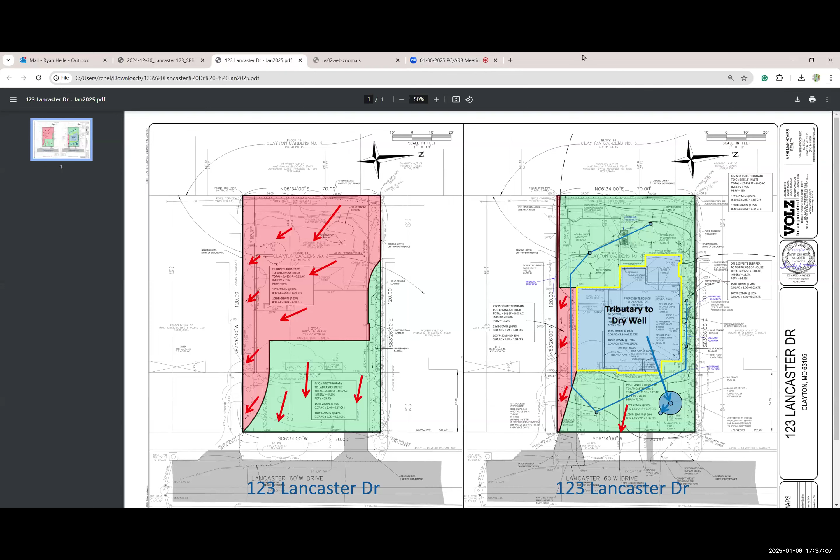Hey, everybody hear me? Welcome, Eric. Great, I wasn't sure I was logged in properly here. As Anna stated, we made some minor changes to the site. We are increasing the runoff a little bit, by about 0.07 CFS. But to counter that or mitigate that, we designed the site to have the entirety of the roof area go to the dry well in the front yard.

And that is a volume of 0.21 CFS. So the dry well is sized to accommodate that entire runoff for the 15-year, 20-minute rain event. So we're detaining more than exactly 3 times as much as our differential.

We have one neighbor to the south that had runoff going to them, and we dropped that from 0.27 to 0.03 CFS. No other neighbors were getting any direct runoff. Everything else is going out to the street. If the geotech report indicates that the dry well needs to be upsized, there's still plenty of room in the front yard that we could expand that dry well as needed. If there are any questions, I'm more than happy to answer them.

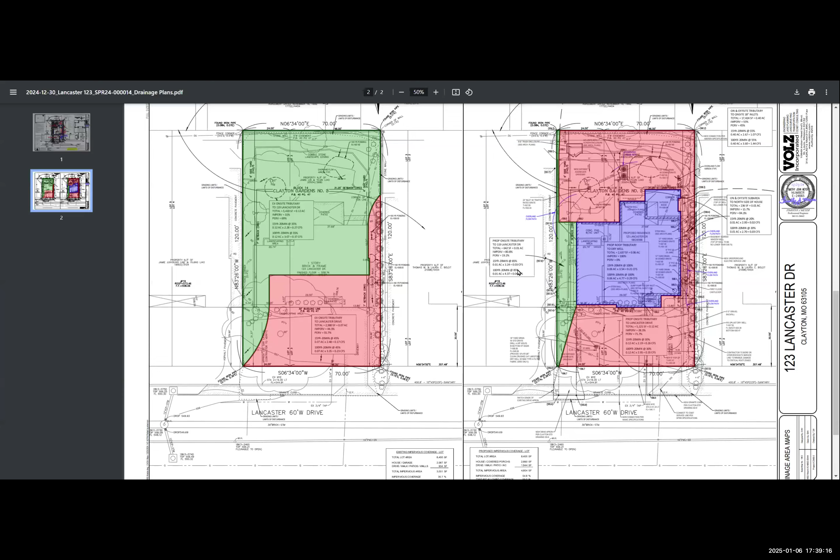I think, sure, yes, just a quick summary. Well, it's actually very easy. All those yard drains go to another yard drain that's out in the front that will act as a pop-up emitter. The size of the pipe is larger than the available pop-up emitters. NDS makes pop-ups in sizes of 3-inch, 4-inch, and 6-inch. We have an 8-inch pipe going out to the front, coming around from the back, the backyard, and the driveway. So we can't use a pop-up.

What I did was use a yard drain as an emitter, and I've used this on a few MSD approved projects coming out of MSD bioretention basins, and they've approved those in the past. Not that they probably weren't looking that closely at this, but MSD has already approved these plans. Like I said, it's a solution I've used a few times when we have pipes that are larger than we could normally put a pop-up on. So all 5 of those yard drains go to that one in the front, and that's the final discharge point.

And we had to do this solution because there's not a whole lot of slope on this site to be able to allow for daylighting a pipe once you get drain basins deep enough for them to actually function and convey just as they're manufactured.

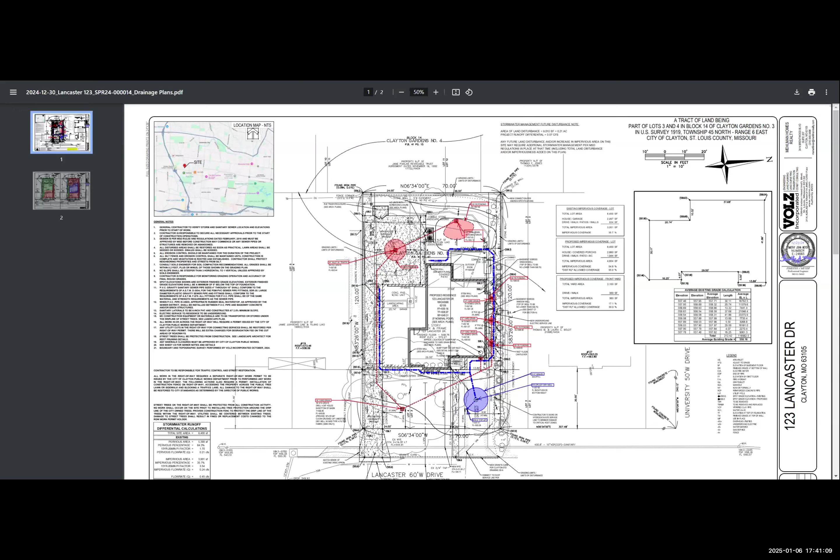Oh, okay, so they're all going out to that blue dry well. No, there's an 18-inch yard drain just north of the driveway. It's highlighted, there's a rectangle around the 18-inch yard drain note on the screen. It's on the other side of the yard from the dry well. I try to keep yard drains out of dry wells whenever possible, just because surface debris clogs up a dry well much quicker.

Okay, now that makes sense, thank you for that. My pleasure. Good, well, reading it on an 11 by 17 was a little difficult, but the screen has made it better, as well as your explanation. Well, thank you, I'm glad.

Let's see, are there other questions, Bob?

I'm just concerned about the water runoff. You're going to do a percolation test by a qualified geotechnical engineer. Your intention is to do that as soon as you get approval of this. Is that where we're heading? Well, that's staff's recommendation. So if staff is recommending we need to do a soil infiltration or percolation test, then that needs to be done.

The staff report did not specifically state when that needed to be done. Usually that would probably be closer to the time we would be digging for the dry well. That way construction traffic doesn't alter the soil characteristics. You could get a very favorable reading right now, but once all the construction traffic moves through there, you could get a different reading. So I would suggest that the city allow us to wait until prior to construction of the dry well to do that percolation test rather than doing it at the onset of construction. But that is up to staff.

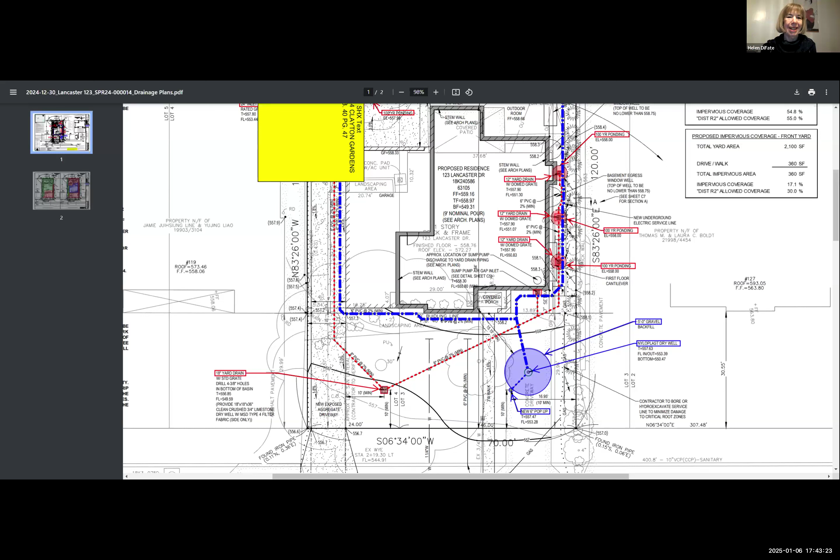All right, Kami? Just one quick question. So when I look at the proposed drainage area map, is all the stuff in the purple that's encapsulating the house going to the dry well? And then all the pink is going to that pop-up in the front of the house, is that right? Yeah, all of the pink is going out to the street.

So then what is the other drainage in the backyard? Everything in the backyard is being piped out to the street. There's a little sliver of green on the south side of the proposed house that goes to the neighbor.

And that's where that significant reduction from 0.27 to 0.03 is found. Everything else goes out to the street, and there's a street inlet just south of, basically in front of the neighbor's house to the south. So it has to pass one driveway before it gets into the MSD sewer system.

Okay, and so then all the pop-up in the front yard, when it gets filled, that goes where? Just goes out to the street and then into the sewer. Okay, and so then what is right to the south of that driveway on this property? It's the neighbor's driveway.

So is there any concern that when that pop-up pops up and the water comes out of it, it'll flow over this person's driveway into their neighboring driveway? No. Anything that comes out of this 18-inch yard drain, if it goes south before going to the street, it's going to get to the proposed driveway, which will then convey it directly to the street just by its slope characteristics.

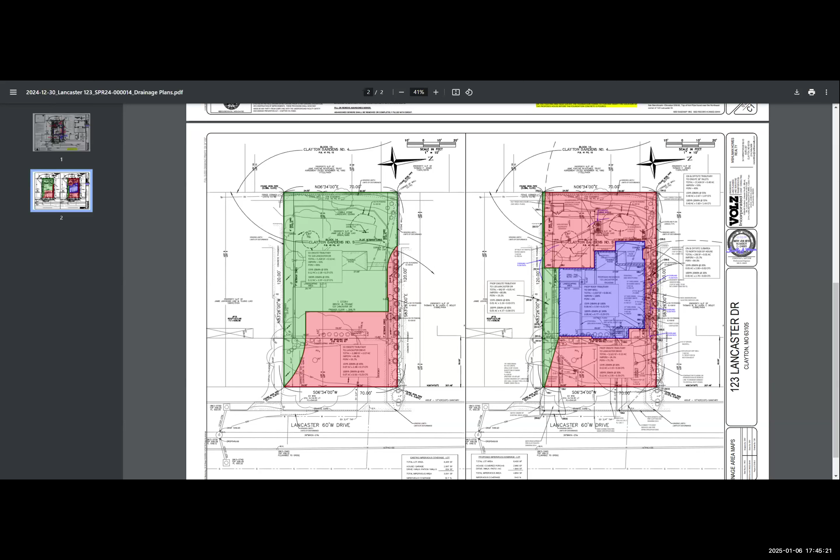Overall, I think I'm pretty good. I really like the idea of the percolation test. For several weeks now we've discussed dry wells and the sizing of dry wells, and we've mentioned the fact that we're not civil engineers, so it's tough for us to determine the size of a dry well. So I really like the solution of taking our best stab at it, but then doing a test to make sure we get it right. But other than that, no further questions.

Okay, David? No questions. Okay, we do have two conditions on the staff recommendation.

Eric or Lauren, are you in agreement with that? I've read both, the deed restriction is a standard one, that's always a condition for approval of my site plan. So the only other one would be the soils report or percolation test. If that's what staff is recommending, then that's what we need to do. Just need to work out the timing of that, and that could be worked out with staff if this board is okay with that.

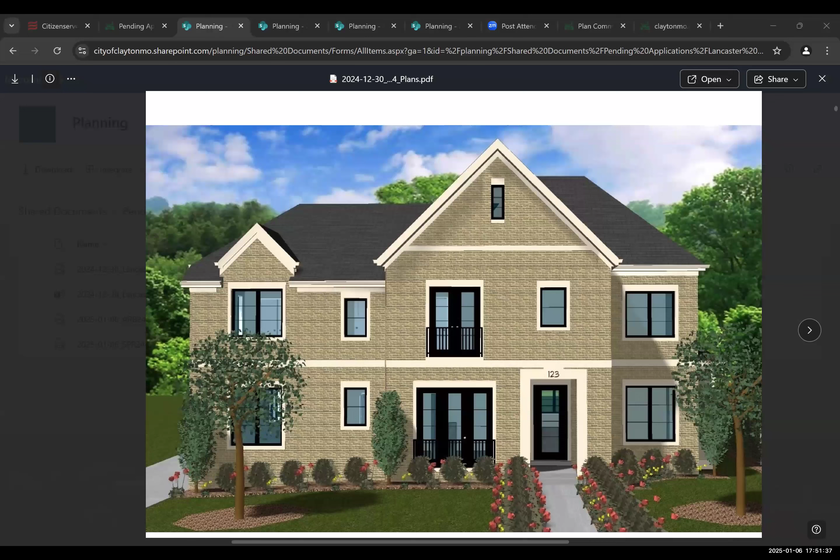I think it blends in well with the neighbors, and I think Ryan Helle wrote a very nice report explaining how we did the height mitigation to the existing home to the left. We're lower than the Boldt residence to the right, and then we mitigated the height to the existing older home to the left.

Well, Lauren, you mentioned the air conditioning compressors. They look like they're not adjacent to the house. Is that correct? That's correct. They're off the driveway to the rear of the house. We didn't want them too close to the porch. They're kind of right in the middle of the property, actually.

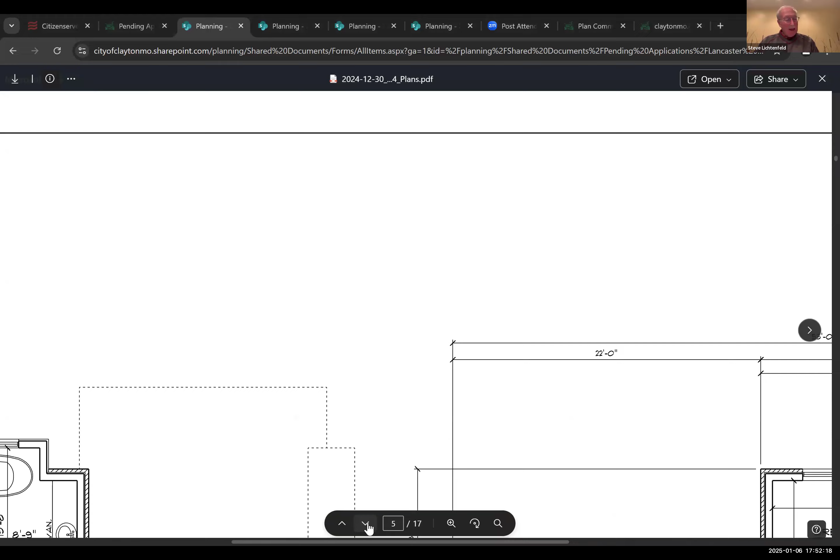Yeah, okay, I don't think we've seen that before. Yeah, we carefully considered that location with Mark and Debbie Melman, and that's where they would like to put them. You'll see the Baxter Gardens plan has quite a bit of landscaping all around those AC units as well. We couldn't really put them on the side of the neighbor to the right because of the wall and the existing landscaping, and we couldn't put them on the left because we have a driveway there, so they ended up in the rear.

Yeah, well I just had a question about that.

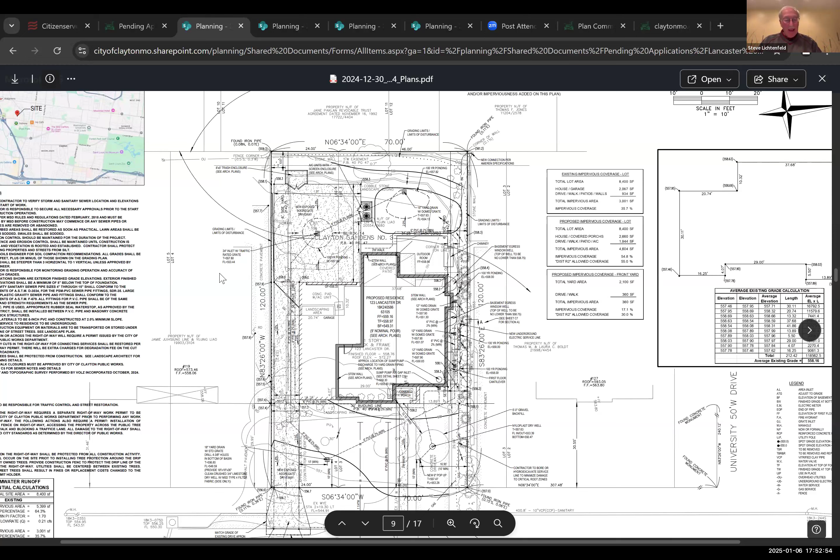I think it looks pretty good, being in the Clayton Gardens Development District. There's the plan. You have a partial step down on the south side, that would be the left side. Quite often we've seen a longer step down, not just at the rear of the property, but I think it works pretty well. And I'm okay with it.

The materials and the dimensions and the roof, they all look good. I'm also glad to see that the floor level is pretty well at grade or just slightly above it. The Bolt residence next door, the first floor level is much higher than the grade, but I think it works out well on the Melman residence. So I'm okay. Bridget?

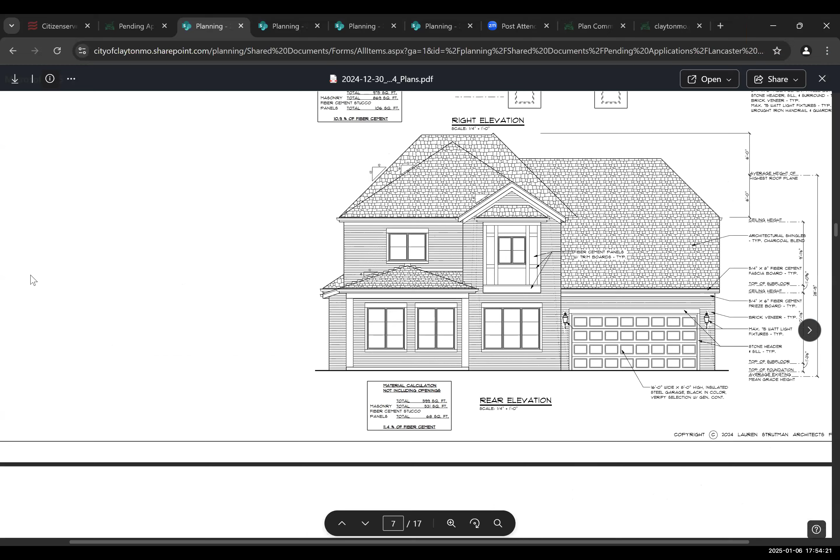Lauren, I was just going to—even though I've been on this commission for almost two years now—just in looking at the plans, I see you got like an outdoor room, but not a patio or anything, is that right? Oh, that's all Mark and Debbie wanted, just a porch, a small outdoor area, and there's no patio proposed. To talk a little bit about the height, the Boldt residence to the right has a tuck-under garage, which raises those houses up, and we have an at-grade garage here.

Mark and Debbie and I also talked about it being a really nice thing to do, to not have a lot of steps in and out of the back door of your house. So in the rear, they just have one step going down to the porch, into the grade and the garage. I think a lot of people like these days. So the outdoor room, it's not really enclosed, it's just like a covered area. Got it. I didn't know if it was like a three-season room, I couldn't really tell, so.

It's just a patio with a roof on it. Okay, got it, that makes a little more sense. It's just because, and I understand it's more of a site plan question too, you're just right up against that maximum amount, so you can't add anything, I guess. There can't be any other impervious space back there. So I just wanted to make sure that they had all the outdoor space that they needed. Sure. Okay, thank you. I don't have any other questions.

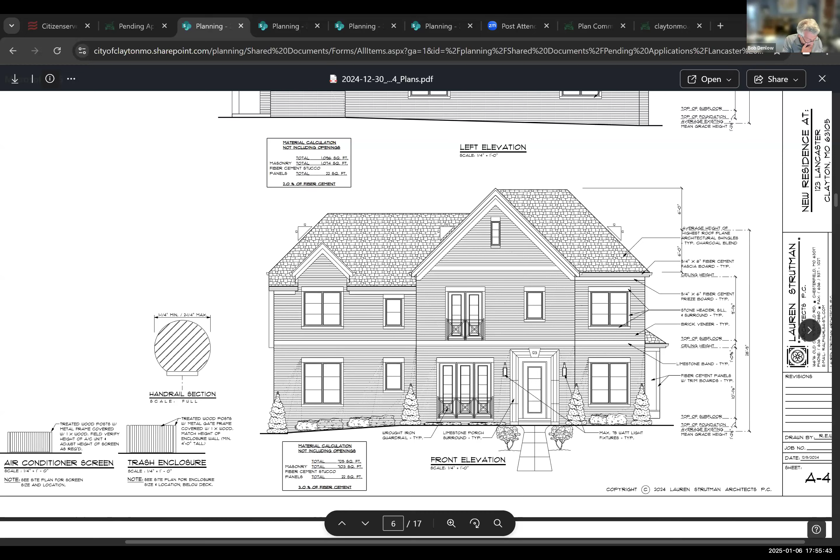It looks nice. Bob? For the reasons that Steve was outlining, I like it. What's interesting, I look at the picture on your page 2, which shows the three homes, and the one on the right, the two-story building, looks like a first cousin of your proposed visual. It's got similar brick appearance, black windows, the white trim around, and the white trim around the entrance. It fits in pretty well, actually, into the neighborhood, and the height difference of the property to the south. I think under all the conditions, it works okay.

I have nothing further. Okay, Helen? Helen, are you with us? Yeah, I was muted.

I have a question taking off from what Bob just said. Is the brick of 123 the same color as 127? No. 127 was a house built by Bobby Slavin, and he used it on another house, this house, on another house on Forsyth.

It's a very slick tan, kind of sophisticated townhouse brick, and it's one that we've seen a lot in Clayton, whereas Mark and Debbie Melman's has more variety to it, and it's a gray color. They're similar but different, not by any means the same brick, even though our color rendering kind of looks like the color picture of 127 Lancaster. The bricks are definitely not the same. Okay, no, it is hard to tell on photographs and then renderings.

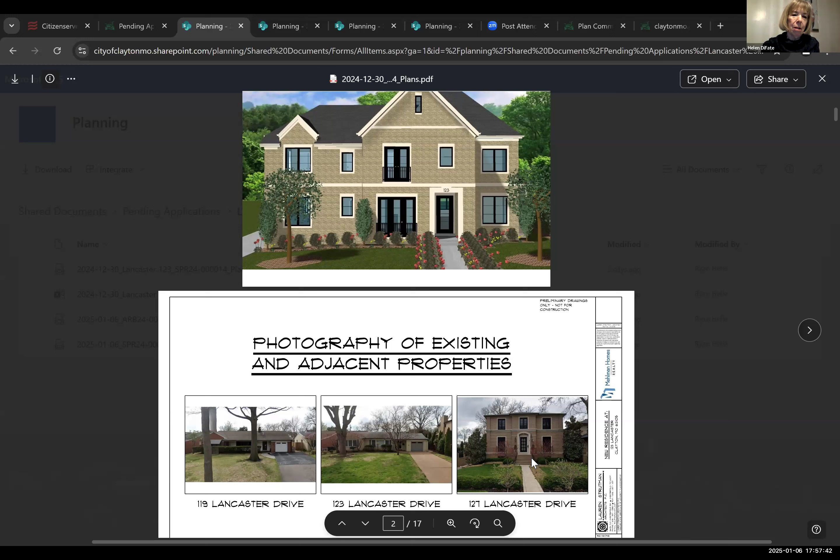So that sounds good. The other thing is the ornamental iron. I like that detail on the front. On some of your drawings, it is identical to 127. It is not just the verticals that you're showing now. Which will it be?

I would actually have to ask Mark and Debbie Melman that, but I suppose it could be either one. We have the verticals I can see on our rendering, and on our street context we have the X's, although I will say these homes are quite different in style. The 127 is a completely symmetrical, more formal townhouse look, and this one is a more interesting style with more character to it. And I can answer one or the other if you all would prefer.

I can text Mark Melman too, he's on the phone. I could ask him if he would like the vertical versus the ones that are squared up, kind of an X style.

It's a detail, but my thinking looking at it was it shouldn't look the same as its neighbor. That is, you've described the brick as being different enough, and this was just a detail. Personally, I like what's shown in the rendering because it's simple and different than what is next door. So, but it's a detail—I think what you've done looks good. I like the way it steps down. I think it'll work well and look great in the neighborhood. Thank you.

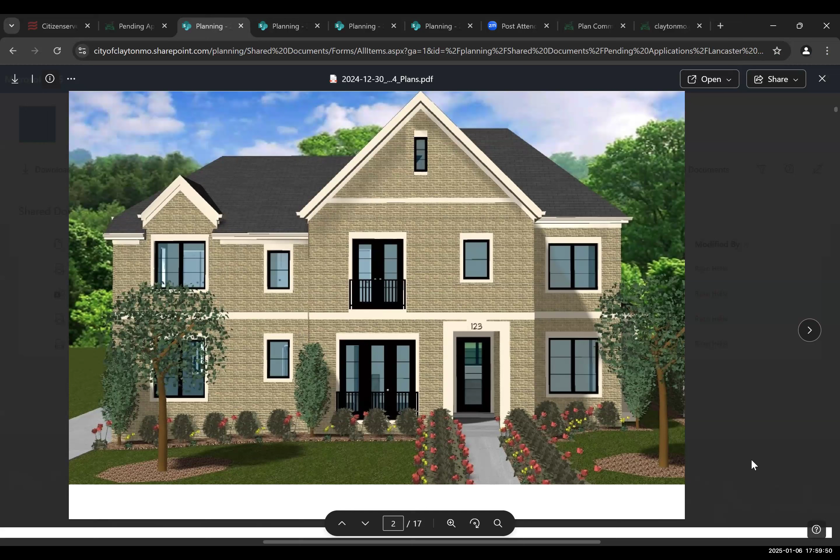I had the same questions as Helen. Lauren, thank you for answering. I was worried about matching the brick to your neighbor and the railing detail, but I think it looks great. Similar to Helen, I really appreciate the asymmetrical facade instead of just the standard little cube boxes we're seeing a lot of. So yeah, it looks great.

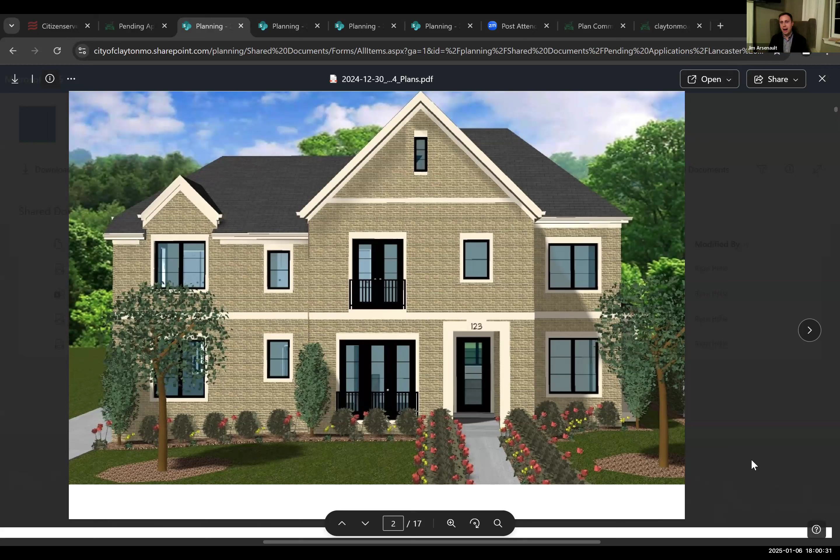Jim, pretty much mirroring what everyone else has said. I really like the asymmetry, I like the step down to the one-story property to the side, and I like the detail on the sides so we don't have just these big flat sides. Overall it's just very successful.

David had no comments or questions. Okay, are there any other hands up? Let's see.

Lauren, did you have anything further to say? Oh, thank you. Glad we got to meet virtually rather than driving into Clayton tonight. This worked well. It's a good looking house, I think Mark and Debbie will be very happy.

We have a hand up now. There is, okay.

Good evening, thank you all for your time. It's Laura Bolt. Lauren, I think the house is great, it looks really good, and we're looking forward to being neighbors with Mark and Debbie. I've had an opportunity to speak to Mark, and we'll meet over little things that really aren't of anybody else's concern but our own. But I do like the idea of not matching the railings, of course. That's just my opinion as a neighbor. I kind of like our house the way it is, and I think the one you've just designed, Lauren, for the Melmans looks great with either railing, but in light of our railing next door, I would hope they would use the alternative, the one in your rendering. It's a personal opinion, it doesn't really mean much, but I just thought I'd express myself. Thank you all for your time.

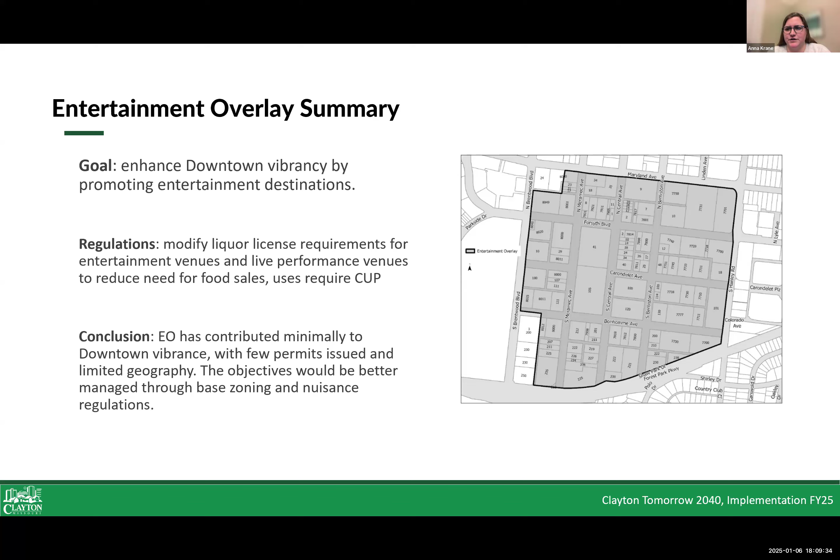So what we've proposed is a text amendment that impacts two different chapters of our adopted code: chapter 405, which is our zoning regulations, and that's in the purview of the Plan Commission, which makes recommendations on it; and connected is chapter 600, our alcoholic beverages chapter, where we have liquor license requirements. The Plan Commission doesn't have any recommendation or oversight with chapter 600, but the elements are connected, so both have been included in your packet tonight.

Really what we've done is the big recommendation is repealing the entertainment overlay district, but retaining elements of that elsewhere in chapter 405. Within our definition section, we're going to update the current definition for a tavern or a bar.

We also currently allow wine bars, and then we're going to add entertainment venues and live performance venues, and have bar, entertainment venue, and live performance added as approved uses within the high density commercial district with a conditional use permit.

Second to that would be some of the requirements specific to entertainment uses and live performance venues that are currently in the overlay. We would add those to a new section within chapter 405, so we'd still have some or all the requirements we have today for those venues, such as noise abatement plans, seating concept layouts, capacity, etc.